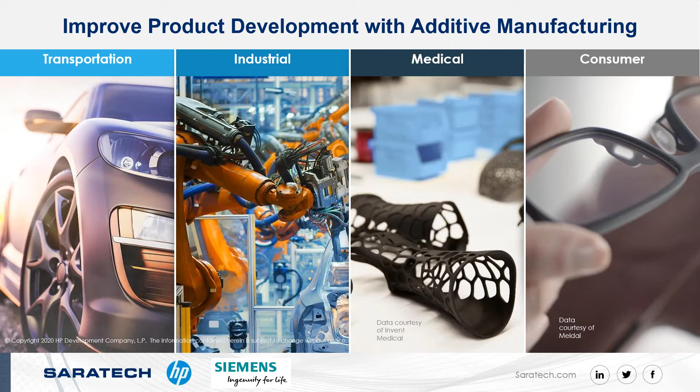Today we'll be discussing how to leverage 3D printing to improve product development. I'm pleased to announce that joining us are special guests Wes Kramer from HP, Matt Schmidt from Siemens, and Jeff Blanford from MORF3D Aerospace. In the next 45 minutes, we will discuss why you need to seriously look at adopting 3D printing, how to choose the right 3D printing technologies for your company, and ways to optimize your current 3D printing process if you are already an adopter.

Our customer, Jeff Blanford from MORF3D, will share how they are using additive manufacturing and Siemens software at MORF to improve their process. I found these quotes very interesting.

Some of the world's greatest leaders and brightest minds denied some of our greatest innovations. Make no mistake, predicting the future is impossible, and it would be naive to think that we could. Looking back at some of the brightest minds of the last century, we can see that they often got the future quite wrong. In fact, nearly everything we take for granted today was at one time discounted by the brightest minds of the day. So today, I invite you to remove any preconceived notions you may have on 3D printing and the future of this technology. It is truly limitless.

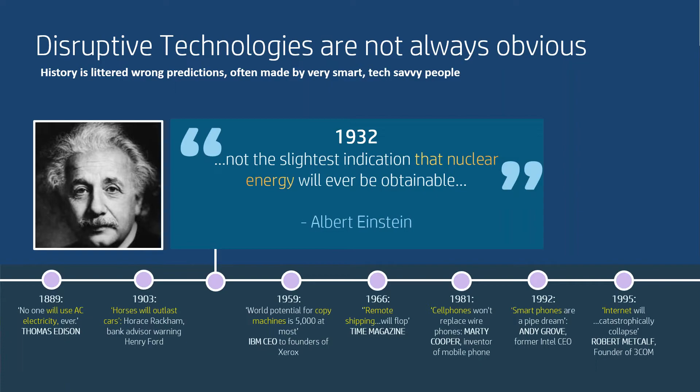3D printing technology has been around for more than 30 years, but meaningful growth did not begin until around 2010. Over the last decade, the industry has been on a stable growth path. It's expected to expand at a compound annual growth rate of 21% between now and 2026. Although 3D printing is still less than 1% of the global manufacturing market, additive technology is becoming an invaluable tool for production workflows. The perception of 3D printing as a prototyping technology only is definitely changing.

A recent survey conducted by 3D Hubs indicates that 84% of engineering businesses maintain or increase end-use part production in 2020, and 73% of engineering businesses predicted that they will produce or source more 3D printed parts this year. Why are these numbers significant? They show that companies are investing in additive manufacturing technologies. 3D printing is becoming a vital part of the product development process, and you don't want to be left behind.

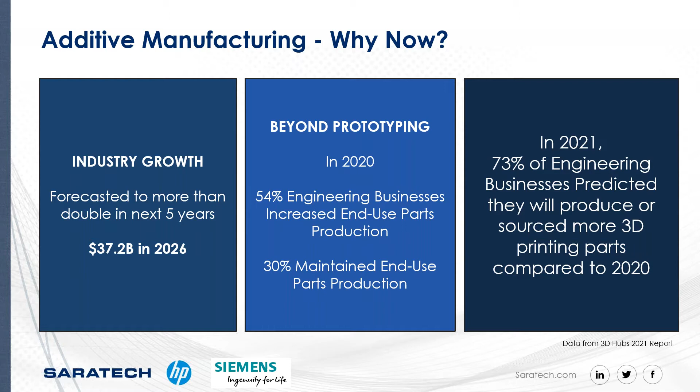The four industries you see here are among the most mature adopters of 3D printing. Let's dig into some of the reasons why.

3D printing makes it possible to develop products at a much faster pace. In some instances, it could be possible for 3D concepts to be designed and printed on the same day. Companies can reduce manufacturing time from months to days, ensuring that they remain ahead of their competitors.

Being a single-step manufacturing process, 3D printing saves time and costs associated with using different machines for manufacturing. 3D printing runs can be automated and monitored remotely. There's no need for operators to be present the entire time. This manufacturing process can also reduce costs on materials. In fact, 80% of the powder used on an HP MJF print is recycled and can be used in future runs.

With traditional manufacturing techniques, complicated designs are generally more difficult or even impossible to produce. 3D printing has obliterated the limits for designers. Advanced software technology, combined with the flexibility of additive manufacturing, allow innovative ideas to become reality.

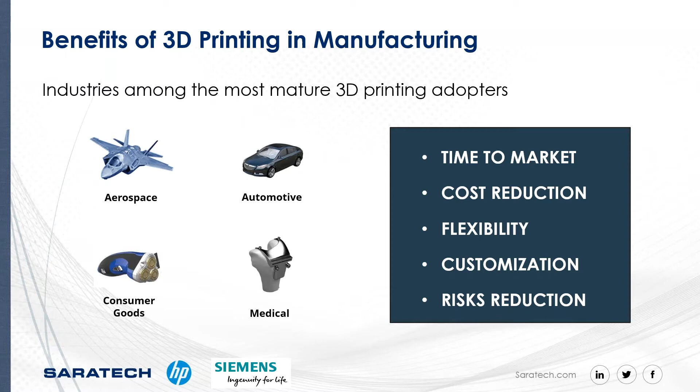At this time, I would like to introduce Wes Kramer, Application Engineer at HP, for the next part of our presentation. Wes? Thank you, Andy. I appreciate you giving some really nice background into 3D printing and what some of the really big key advantages are. So what I would like to talk about today are some real life examples of how 3D printing is being used by HP across different points in the product life cycle for different products of ours.

If you look at the next slide, what I have laid out here is a simple curve that plots the production volume across a product's life cycle. This represents a pretty common trend that you see across many different types of products out there in the market.

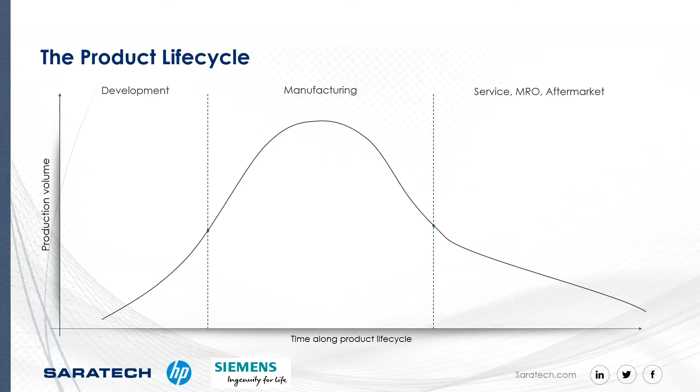Starting out, you have this development phase where you're producing a few prototypes here and there, maybe doing some test parts or clinical trials. You have very low volumes of production to begin with.

Then as the product matures, you start looking at the full-scale manufacturing of that product. You can see there's a peak where the demand for the product is going to be highest, and therefore your supply has to rise to meet that demand.

Eventually, though, other products out there on the market compete and phase out the product. You slowly start getting a decrease in demand, reaching a point where you're no longer mass producing this part, but simply producing enough to keep a nice spare parts inventory to service the machines for the remainder of their lifetime out in the field.

Looking at these first two inflection points, at the very beginning and the very end of the process, there are two things we're looking at. One is prototyping—we're not going to look at specific examples of this today used by HP, but I can tell you it's used all the time, not just at our company. Prototyping is definitely by far still the largest use of 3D printing right now.

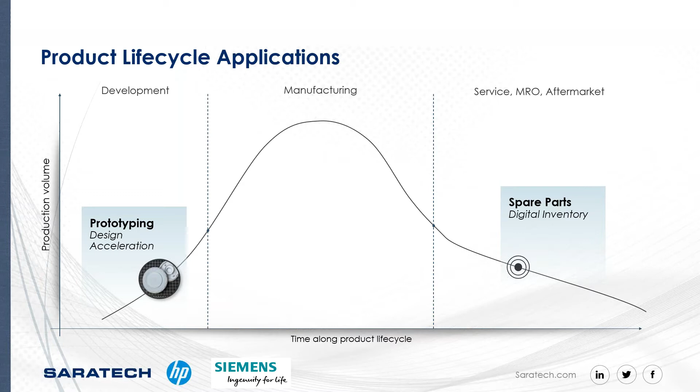It's been used for prototyping for the last several decades. What I'm really excited to show you today is where we can use 3D printing outside of just making prototypes, so let's take a look at this first example of spare parts in this concept of a digital inventory.

What HP did is we looked at some different products of ours, and we looked at this large format printer. This is a relatively high price point product, and it's something a customer expects to be serviced well after HP manufactures and sells the product.

Traditionally, a company would say they reach the end of the life cycle for this product—they're not going to sell it anymore. What they need to do is produce a large inventory of spare parts in order to maintain and service that machine for the remainder of its time out in the field.

This incurs really big costs as we keep a physical inventory of these parts. But what we can do with 3D printing, instead of having that physical inventory that costs a lot of space and a lot of money, is move to this concept of a digital inventory.

We identified several plastic parts and components that we could move to 3D printing. So when a spare part is needed, instead of having to warehouse it, we can pull that on demand from our digital inventory, print it, and send it out to the customer.

Next on the product life cycle, we have something that goes along the entire duration of production, and that's manufacturing aids. Think of jigs, fixtures, tooling—things that need to be custom made in very small runs to assist with the manufacturing process. 3D printing is an excellent option for producing these parts.

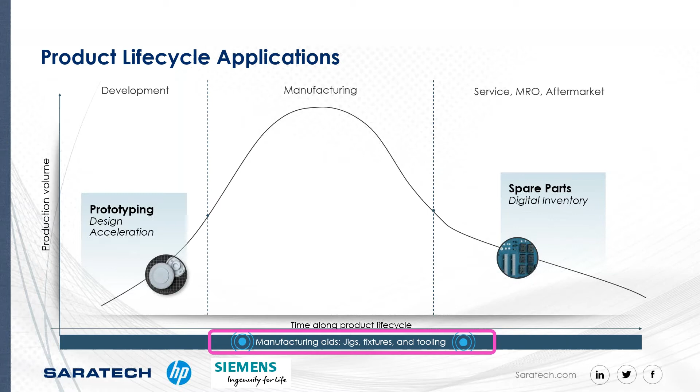It weighed a lot. You had to order it in a minimum order quantity of 13 from a shop. And I'm actually surprised with this turnaround time—it would only take about 3 to 5 days.

We were able to transform this design and consolidate all those parts into one part that we printed out of plastic. It saved a ton on weight, reducing it by 90%, and the cost went down astronomically as well—now you're looking at about $18 per part versus the assembly costing $450 before. You can make it in a minimum order quantity of just 1.

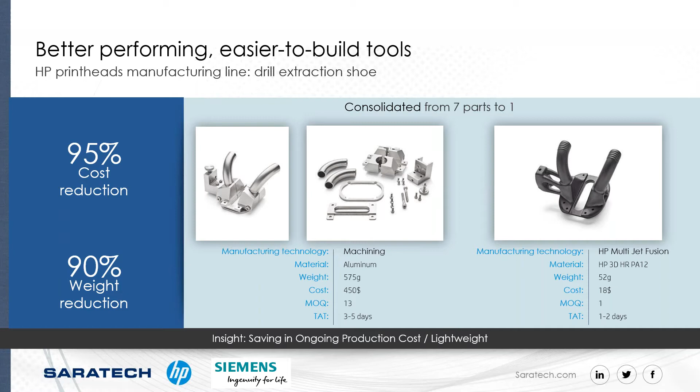You can produce it on demand, as many as you need, and the turnaround time is only going to be 1 or 2 days. So an excellent example of a manufacturing aid being able to be much more efficiently produced with 3D printing.

Next here on our product lifecycle journey is, I think, a very key inflection point where we're seeing 3D printing address this concept of bridge production.

So what do you do when you have a new product? You don't know how it's going to perform out there in the market. You don't know what the demand's going to be. You don't know if you're going to have to make changes to the design. Traditionally, you would have to basically roll the dice, pay upfront for a tool for those parts to be machined, and you're going to start mass producing that part. If you need to make a change, you're out of luck.

So bridge production, this in-between phase between the design and development process and full-scale manufacturing, is where 3D printing can really address this with the design flexibility it gives you.

So if we look at the next slide, here's an example of how HP used this concept of bridge production with 3D printing for a new product it was introducing. This is a 3D camera that was a brand new market space. We needed to put it out there quickly. We needed to learn, and we needed to be able to iterate.

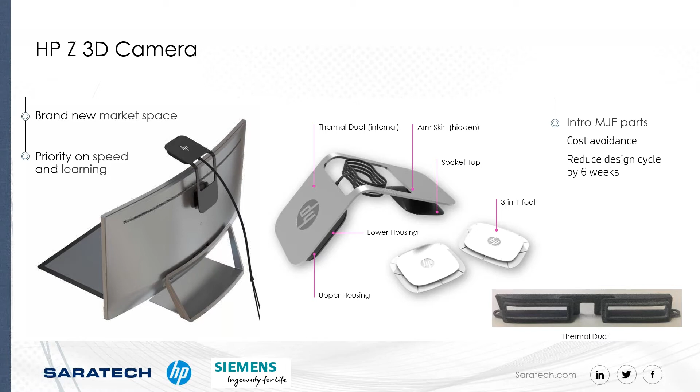So we identified a few different components on this product where we could 3D print plastic parts. What we were able to do is avoid paying upfront for tooling costs. We were able to learn from our customers and make any design changes we needed. We were able to learn what the demand was going to be. And then if we needed to produce tooling later on to mass produce this in quantities of tens of thousands or millions, we could. But in this awkward in-between bridge production phase, we're able to use 3D printing to avoid a lot of costs and to allow the design flexibility to offer changes.

And then last on here is actually full production. A lot of people don't think full production could be possible with 3D printing, but HP's breakthrough speeds, part strength, and accuracy are all enabling that. And we're going to talk a little bit about that later on here.

But why you would 3D print parts in full production might be because you wouldn't be able to make that part with traditional manufacturing. So we have a few different use cases where the geometry is such that you couldn't injection mold it or you couldn't machine it, and it's been optimized for its performance, and you could only manufacture it with 3D printing.

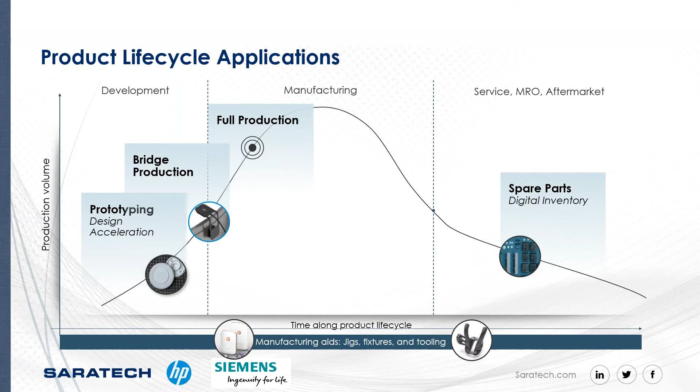So we have a really cool example, if we look at the next slide, of how we were able to take a part and optimize it, then 3D print it in the end. This was a partnership that we had with Siemens, and we worked together to optimize the airflow through a channel around a bend in one of our systems.

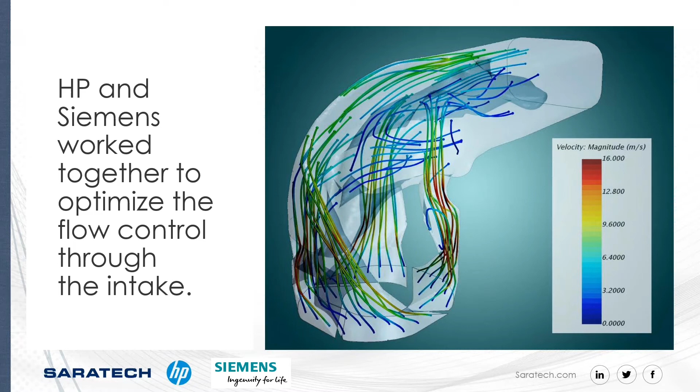So the next slide here, we can see what types of improvements we're able to make. In order to injection mold this part before, it was actually made up of 6 parts that you would have to assemble. Because of die lock constraints, you wouldn't be able to injection mold that all together in one piece—you'd have to do it separately and assemble it later on. So you're looking at something like $30 to do all of that. Well, the first thing we were able to do with 3D printing is consolidate all of those parts into just one, and that already was saving us a lot of money just from avoiding the assembly steps.

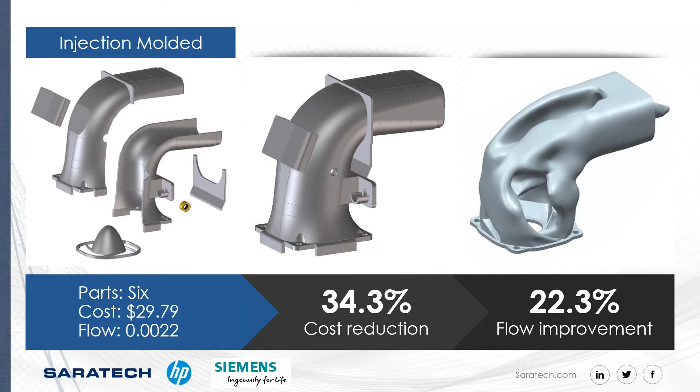And then we took it a step further and enlisted the help of Siemens to run a CFD analysis to figure out how we could optimize this design, this topology, to maximize our airflow through this channel. We were able to improve the flow by 22.3%. So not only were we able to save money on the production of this part, we were able to enhance the performance of the part, which is going to save money for whoever was operating the machinery later on. That's an excellent example of a 3D printed design that could not be traditionally manufactured, and one that we would go into full-scale production with.

So looking at HP's strategy here, this is why we're talking about not just prototyping, but different points along the product lifecycle journey.

We don't really believe in simply doing as good as what's been done in the industry before. We want to do better. So instead of just looking at this 3D printing space, we want to address this $12 trillion manufacturing sector. We want to go for that bigger piece of the pie.

In order to do that, there are a few things that need to happen that we've identified. A few key ones are that we need to enhance product capability, so we need parts that are stronger, more accurate, more repeatable, closer to traditional manufacturing means that are out there. This has been a challenge for additive manufacturing for a while. We need better material prices that compete with traditional manufacturing, and we need a wide portfolio of different materials, just like traditional manufacturing means that are out there.

So in the next slide, we take a look at the MJF process and what sets it aside from the other 3D printing processes, and why it is uniquely capable of addressing some of these major challenges in this market and addressing that manufacturing sector.

At a very high level, the process works using two agents. We leverage our inkjet printing technology, the same technology we use in our 2D printers. Instead of printing ink on paper, we print this fusing and detailing agent on a thin layer of plastic powder. The first step in the process is to spread a thin layer of plastic powder, about 80 microns thick.

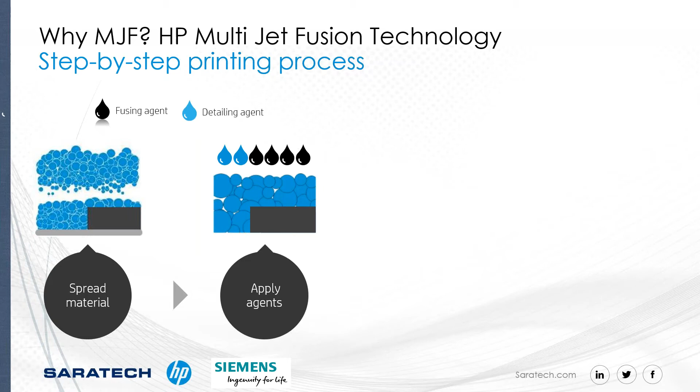Next, we apply thermal energy. Just like a black car in the summer gets hotter than a white car, the black fusing agent absorbs infrared light energy, and that's enough to put it into a full melt, allowing it to fully melt and bond with the layer below it. It's not just bonding, but fusing to that layer below, which gives you great isotropy and great mechanical properties in all three axes. Once you apply that energy, what you're left with is this fully fused material.

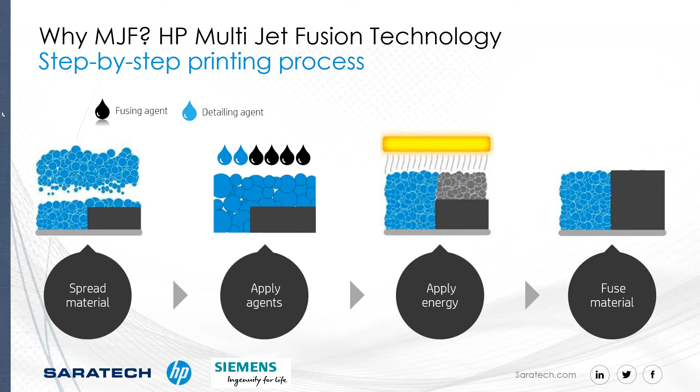So what we're going to look at next is a video, and it's going to highlight how we're looking at an area-wide process here. It's not just a point-based system like the previous 3D printing technologies.

I really like that video because the analogy I like to use is: think about writing a paper for a class with a pencil or a pen. You have to trace each letter individually, versus just printing that paper for you, done in one fell swoop. That's how our process works, and that's how we're able to produce so many parts so quickly, and it's what allows us to introduce this concept of mass production with 3D printing.

Again, you're not just producing parts quickly, but we have full layer-to-layer fusion, which makes parts very strong. We have high levels of detail with our print heads that allow us to achieve great accuracy. So we're really starting to disrupt this 3D printing industry and address this $12 trillion manufacturing space.

To recap quickly, the concepts we talked about today: we're taking this traditional part design cycle where you design for your manufacturing process, simulate that process through mold flow or something similar, design a tool to manufacture it, fabricate that tool, then build and test your parts, and if something goes wrong, you have to start that whole process over again. This is a process that in some cases can take several months, even over a year, and requires a lot of collaboration with other companies, often overseas, taking a very long time to get your product out there in the market.

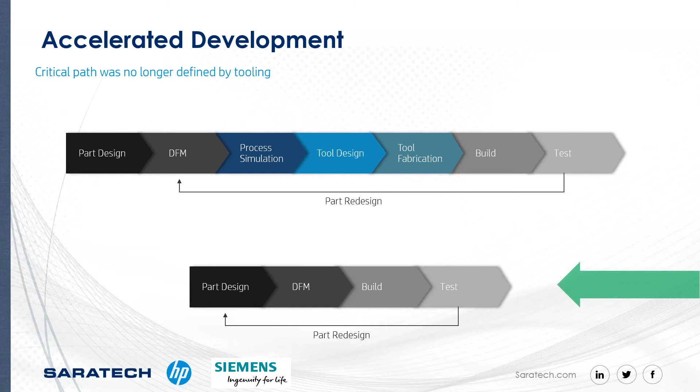For all these different sectors. But at the end of the day, your printer is only as good as the parts you're going to be printing. And to get really nice quality parts, you need very nice quality design software. So I have the pleasure of introducing Matt here with Siemens, who's going to talk about that first step in the process, which is going to be the part design and getting really high value parts from your software. Matt, I'm handing off to you.

All right, thank you, Wes. Impressive technology. Thanks for that. Welcome, everyone. My name is Matt Schmidt, Portfolio Development Executive for Siemens Digital Industries Software, and I focus on helping our customers with the industrialization of additive manufacturing. I collaborate with our channel partners here, like Saratech, and our additive manufacturing OEM partner, HP, to help tackle the various challenges of additive manufacturing with the use of our software solutions.

Next slide. So the goal here today is to talk about additive manufacturing from the small to medium-sized business perspective and how we can help growing customers utilize software solutions to help them solve the hard problems that often lead to slower adoption rates and less benefit realization.

If you're an additive manufacturing supplier, for example, this might mean lower profit margins due to failed builds or long lead times, due to collaboration issues with customers. If you're developing products, new product development, this could be part qualification or validation concerns. So either way, tackling some of these challenges can be information overload.

One of the biggest problems in the additive manufacturing world is disconnection. Almost all organizations are managing requirements today in some disconnected way, whether it's your CAD system, topology optimization, simulation software, OEM slicers, or maybe even downstream post-processing CAM data. They're often isolated, and when they're disconnected from the rest of the product life cycle, they're not going to have power to influence decisions, maybe except for during periodic design reviews where you might catch these problems.

But, you know, on the other hand, when something changes either on the requirement or the design side and it's not caught, you don't see the impact or connection, that means your team is going to end up in the wrong place at the wrong time with the wrong revision. Obviously that's not a big advantage to your team.

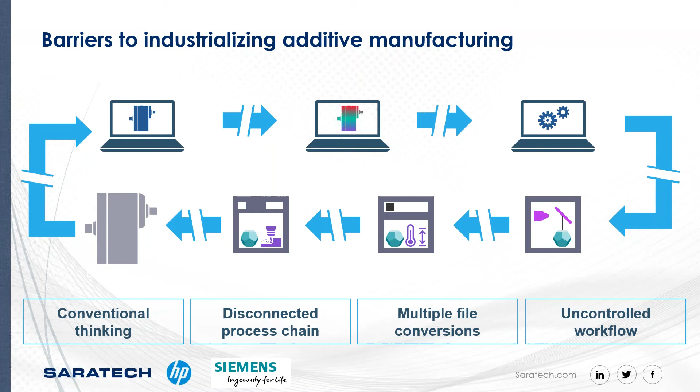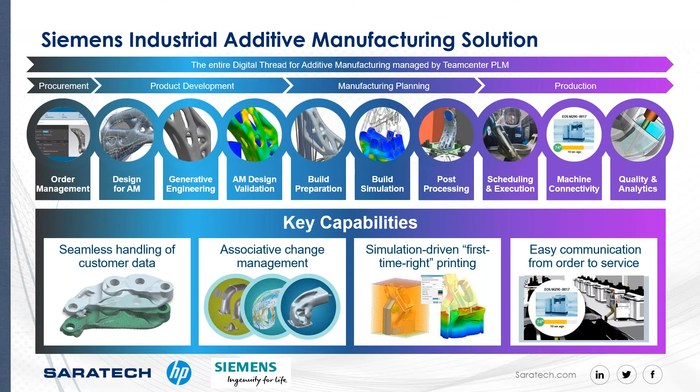Let's start here by dealing with the all-important issue of bad CAD data. One of the major pain points in additive manufacturing workflow is the relative difficulty in importing, fixing, and editing CAD data that has been exported from some point, to modify this for print preparation. This is regardless of whether the customer is in-house or external, a solution provider, or working from another CAD system. You're going to receive some type of file that contains mesh errors, knit surface problems, or maybe even poor additive design practice. And that correction is sometimes highly painful and costs a lot of time to get done.

There's a lot of going back and forth with customers on CAD models. This could maybe even lead to a lost market opportunity or a lost sale.

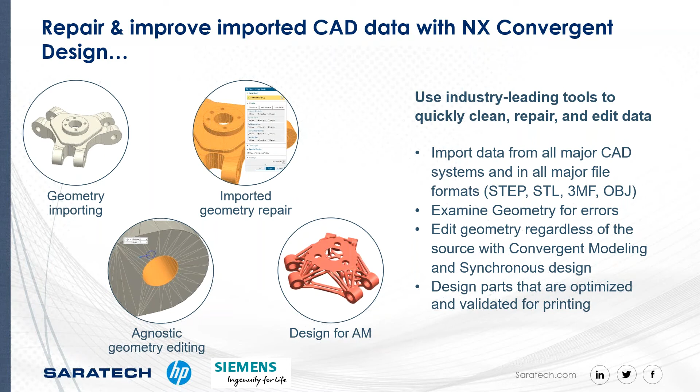With Siemens NX software, you utilize industry-leading CAD tools that allow you to easily import customer data, quickly make necessary corrections, and efficiently push that data to the next part of your additive workflow. This means you can edit geometry using normal CAD tools, regardless of the file format. STL data, step files, native SolidWorks data, it doesn't matter. NX can import, translate, and allow you to manipulate any geometry using the same tool set. You don't need to jump around different software programs, and you don't need to ask for other files if changes are required. All of that goes away with the ability of NX CAD modeling features on any sort of data.

When tackling some of the time constraints and collaborations with your customers, you need the ability to easily communicate things like print feasibility, order filling and status, lead times, quotes and POs, etc.

The Siemens Additive Manufacturing Network is a cloud-based solution that helps you easily collaborate with your customers, regardless of whether the customer is in-house, external, or a colleague. It doesn't matter if you're printing parts for your company or a customer. You can take orders, estimate costs, and give customer feedback about the additive manufacturing process from all perspectives on a secure cloud-based interface. Once you and your customers or colleagues are in the network, you have access to the entire Siemens ecosystem of service providers, OEMs, and suppliers as well.

If your business plan doesn't revolve around design and engineering work today, this is one area of additive manufacturing where you can really help grow your business. The need to communicate quality design for additive manufacturing practices and services is very critical, and many companies are viewing this as an opportunity for growth, creating a competitive advantage over other suppliers.

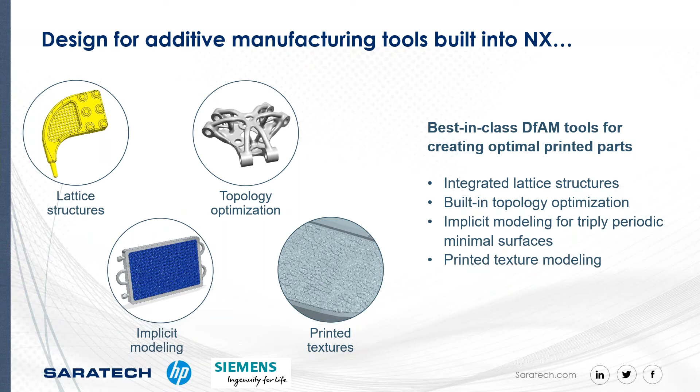Process simulation is another critical component of additive manufacturing in maintaining your efficiency rates. Additive manufacturing has a huge number of variables, and getting any one of those wrong can negatively impact the quality of the output. This results in the generation of scrap and a backlog of time required to complete jobs in the queue. Many companies build a certain amount of scrap, cost, and extra time into their estimates for customers to compensate for this. So a real competitive advantage here is if a company was able to short circuit this and build first time right, eliminating the scrap process.

At Siemens, we've invested heavily in additive simulation and DFAM design tools to aid in first-time-right printing strategies. Today, you can automatically validate both metal and polymer parts for printability with built-in DFAM checkers. These look for geometry issues like thin walls, excessive overhangs, or enclosed voids. Performing these checks up front saves a lot of costly rework time and build preparation down the road. For metal printing, you can optimize certain build orientations to reduce deformation, as well as simulate the entire build process to identify area concerns like recoater jams or heat dissipation.

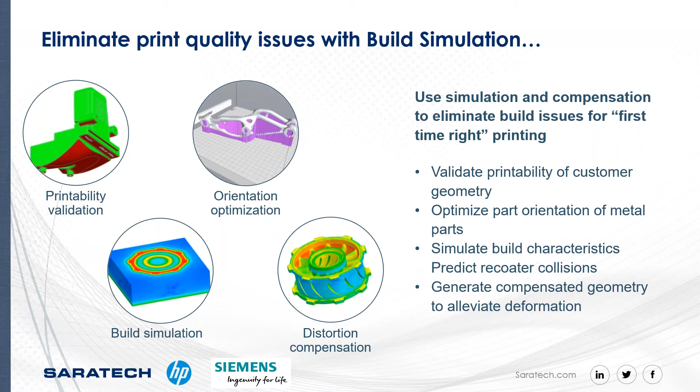Let me focus a bit more on operational efficiency, the time it takes to complete the build preparation process. The disjoint software and silos seen in many companies lead to inefficient production processes. With our system, you can easily place parts in a build tray with automated nesting features, generate quick estimates of cost and time to print, and print directly to the widest range of printer hardware on the market, including metal, polymer, and composite solutions, including our partner HP. By automating the heavy lifting with automated nesting for HP, we're helping reduce the time it takes to complete the build preparation process, getting you to market faster.

Last, I'd like to mention change management and how we can dramatically change the impact of a change upon your process. We all understand how change can bring a process to a grinding halt. How many times has a customer or colleague said, 'we originally ordered 40 of these, but we need 50 now,' or 'we wanted Inconel material but think we can use aluminum to save cost and weight,' or 'we need a slight design change, I need another revision'? How much time does it take to manage these changes in the workflow? Hours? Days to go back through build preparation, simulation, setting up the printer, maybe even changing materials in the printer?

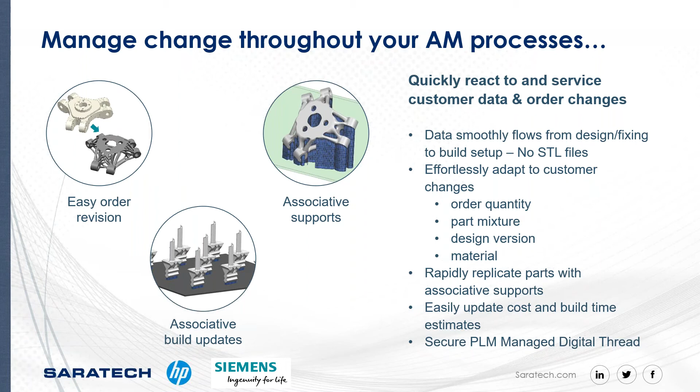We talked about our vision for AM software processes and how we've worked to alleviate many pain points companies experience with additive manufacturing. But Siemens hasn't done this alone. As you've heard with our partner HP, and with Saratech and our channel partners, we have a growing ecosystem. We've connected our strengths with some of the best companies in additive manufacturing. This deep ecosystem of partners allows Siemens to augment our in-house build solutions with power from these partners. What this means for you is that you get the best capabilities in the industry integrated into a single system, allowing you to get the best possible return on investment from your additive manufacturing process.

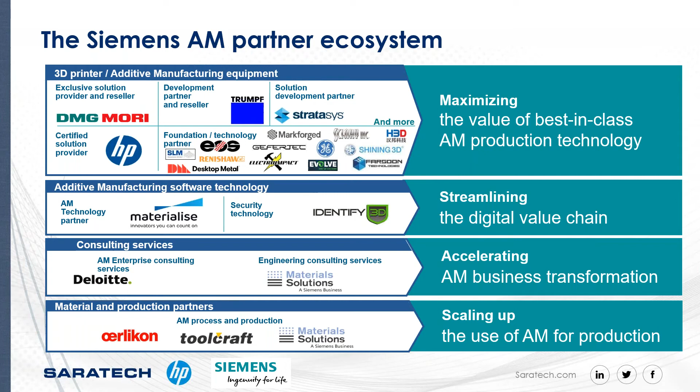But last, you don't have to take our word for it. Our customers are utilizing these solutions today to improve their own ROI from additive manufacturing. I am going to turn this over to Jeff Blanford from MORF3D to explain the importance of his software solutions in his workflow. Take it away, Jeff.

Thank you so much, Matt. Thanks everyone, my name is Jeff Blanford. I am a solution architect here at MORF3D. Today I just want to spend a few minutes telling you about who we are, what we do, and more importantly, why we do it, and how, with help from partners like Siemens and Saratech, we're able to do it. Next slide please. So who is MORF3D, what do we do, right?

We were founded in 2015 as an advanced end-to-end additive manufacturing solutions provider located in El Segundo, California. We just celebrated our 6th anniversary last week, and we've spent those last 6 years focusing intensely on two areas: one, complete end-to-end metal additive engineering manufacturing solutions, and two, specifically for the aerospace and defense industry. Our customers are building everything from satellites and missiles to advanced propulsion systems and engine designs. So that's who we are, that's what we do. Next slide please.

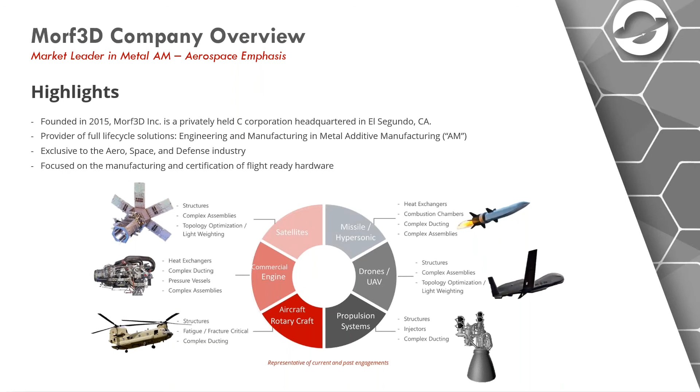That sounds a little bit counterintuitive, but the relationships we're breaking here are relationships between cost and complexity, and relationships of cost and lot size. Typically when a part is more complex, it's usually more expensive, right? More machining operations, more work that needs to be done. And additive really breaks that relationship, whether you're printing a cube or a really complex lattice design. Generally speaking, the costs of the actual printing process itself are going to remain generally fixed.

So complexity is cheap with additive manufacturing. I won't say it's free, that's something a lot of folks say. I'd say it's cheaper. And the other relationship we're breaking is the relationship of cost and lot size, whether we're printing one of a unit or a thousand of a unit. Really, the cost of the print itself is going to be completely variable rather than fixed, so we don't have all those issues with meeting enough demand to justify expensive tooling requirements. And if you take that even one step further, the benefit is that because we have a lot size of effectively one, we're able to basically iterate the design every time we hit the print button.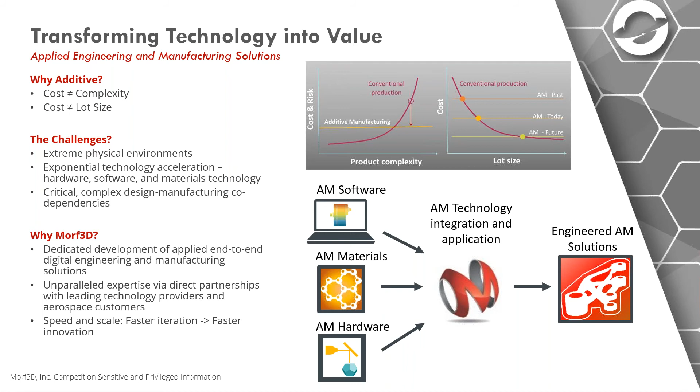So that's really where we sit. MORF3D sits as really a technology integration and application group, where we're consuming technology from our software partners, our materials partners, and our hardware partners, and we're translating all that incredible technology into value for our customers. And because we're 100% focused on additive manufacturing and the end-to-end solutions that those require, and because we're able to move at the speed of a startup, we're able to iterate very quickly, and therefore we're able to innovate very quickly.

What we really focus on here at MORF3D is not just offering printing capacity to our customers. There is some value in that, but really what we're trying to do is walk with our customers through that additive manufacturing journey — whether it comes to evaluating different systems and part designs for value-added applications of additive manufacturing, helping develop material properties and different material requirements, and really providing an end-to-end solution where we're not just delivering time on printer, we're really delivering certified flight-ready hardware.

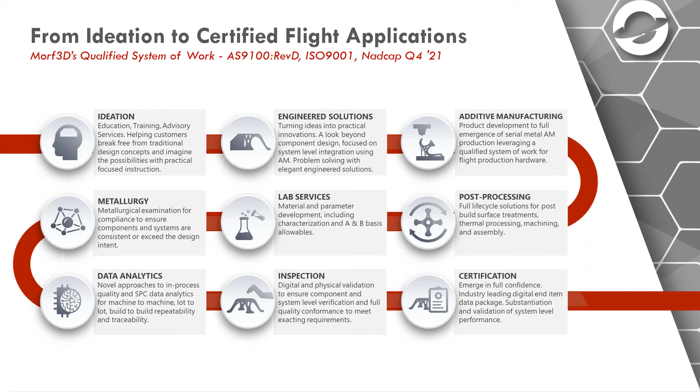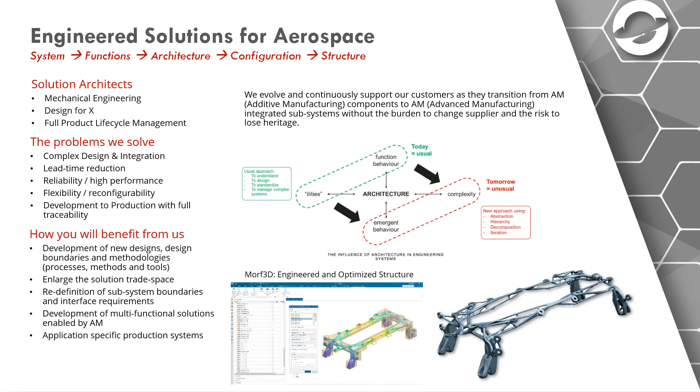Really, what I want to focus on here today is all of this, whether it's the end-to-end solutions we provide for our customers, but driving into higher value applications and moving away from modification for additive manufacturing to truly designing for additive manufacturing. It would not be possible without the capabilities provided by the Siemens NX solution.

Matt covered a lot of this already, but the ability to work with CAD from any source, the ability to generate support structures in an associative way so that if there are design changes we can rapidly update and reprint, and the ability to do build simulation to predict how parts will deform and compensate for those deviations ahead of time directly on the CAD geometry.

All those capabilities are incredibly important, but even more so is the ability to do all this in one place, shrinking down our time from getting a design to actually having a printed finished part. That's really where we drive value, and that's a solution set that would not be possible without partners such as Siemens and Saratech.